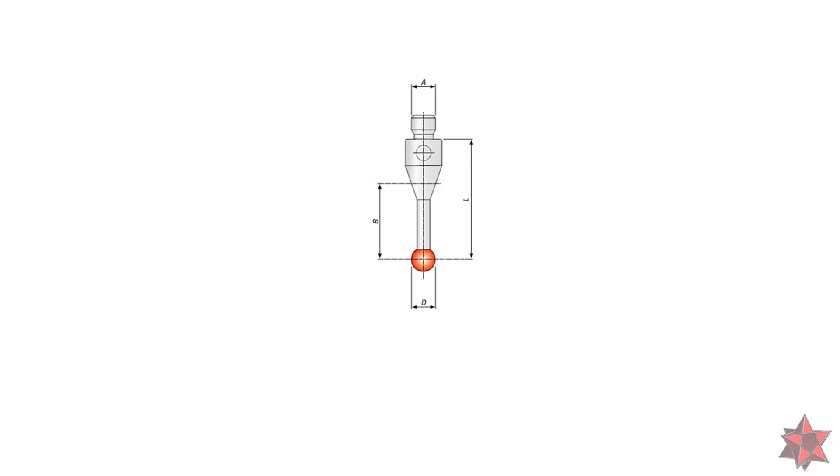A stylus is constructed from three components: the adapter, the shaft, and the stylus tip. Usually, when we look on different sites that sell stylus systems, we will see something like this. Every component from the stylus system is identified and the dimensions are marked so that you can choose the correct configuration suited for your needs.

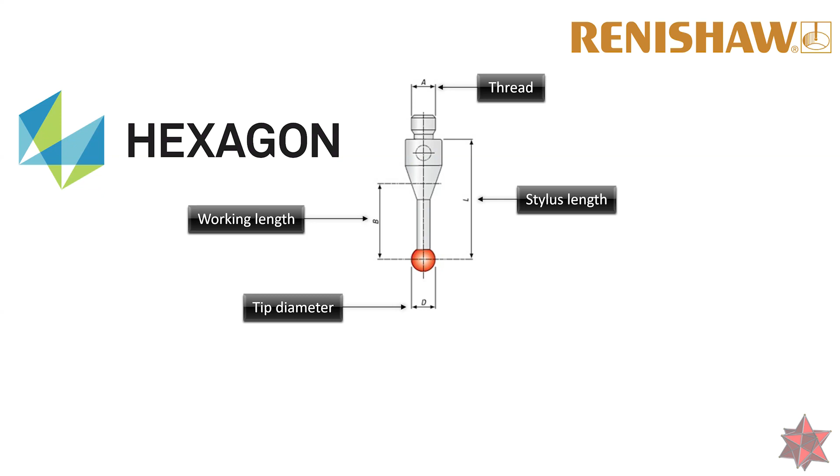Companies like Hexagon and Renishaw typically use shafts that are based on an M2 to M6 threading, and companies like Zeiss use M3 to M5 threads, depending on the type of measuring head used.

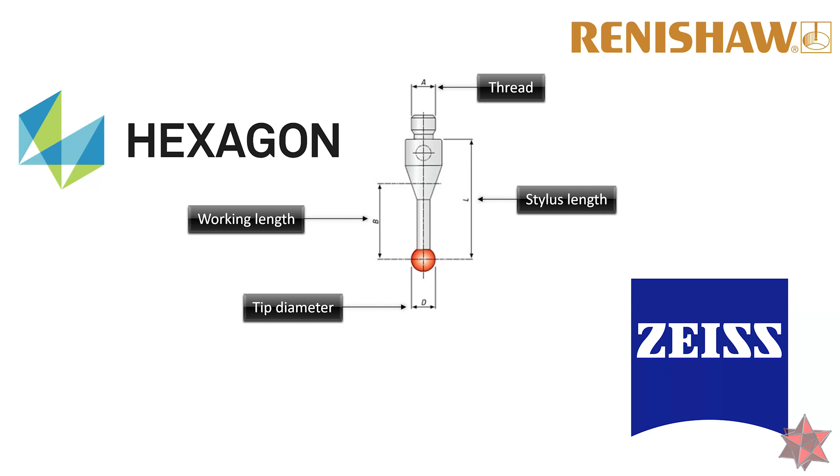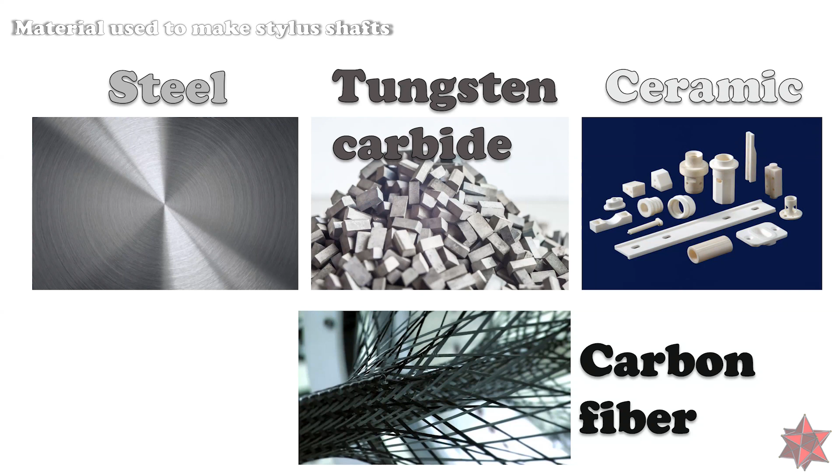Different types of materials are used to construct the shaft of the styluses, like steel, tungsten carbide, ceramic, and carbon fiber. And if we have a look at their specifications, we will find out that the differences matter. For instance, tungsten carbide shafts are heavy, do not have much deflection when touching a surface, which is good, but we have a high thermal change, meaning that when the shaft is longer, the thermal expansion suffers.

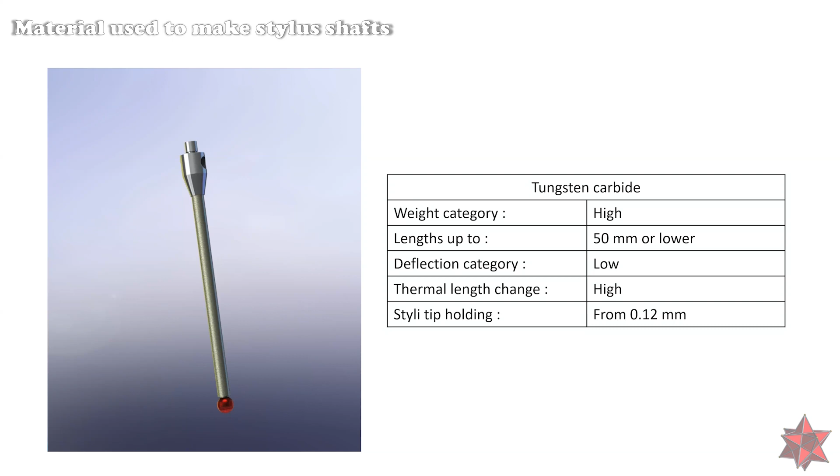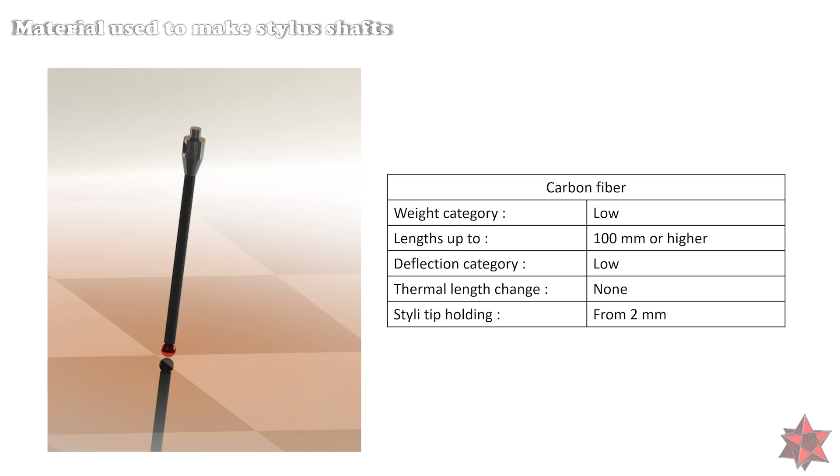But it's great for measuring short lengths or for measuring small surfaces due to its capacity to hold styli from up to 0.12 millimeters. Carbon fiber shafts have less weight, are better at deflection than tungsten carbide shafts, and have non-thermal length change. The only disadvantage for these shafts is that they can hold styli from 2 mm up and no less. Stainless steel shafts are frequently utilized for styli with ball and tip diameter of 2 mm or more and lengths up to 30 mm.

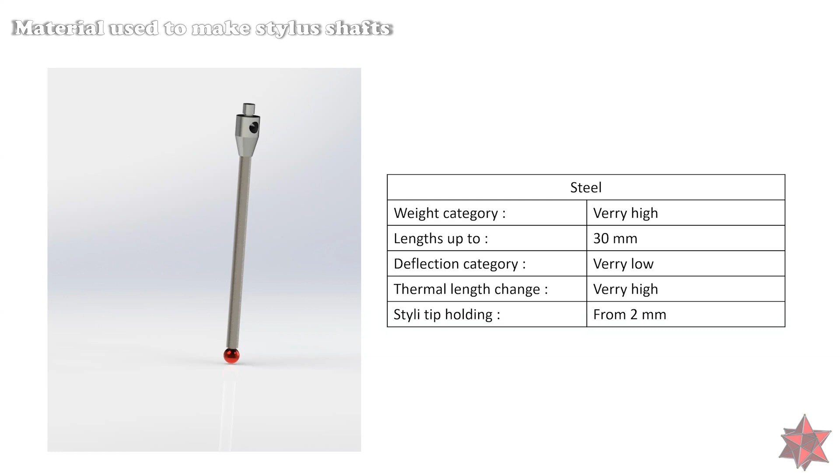With sufficient ball to shaft clearance and without sacrificing overall deflection, we can add a junction between the shaft and the thread, although one-piece shafts provide the best weight to deflection ratio within this range. Ceramic shafts are utilized with ball diameter from 3 mm. They are great with thermal expansion, like carbon fiber shafts. They have great deflection comparable to steel, but lighter in weight than tungsten carbide.

And the best part is that if a collision occurs, the shaft will be shattered, but no damage will be taken by the measuring head. It is recommended that styli longer than 50 mm be constructed with ceramic or carbon fiber shafts due to their low weight and non-thermal expansion properties.

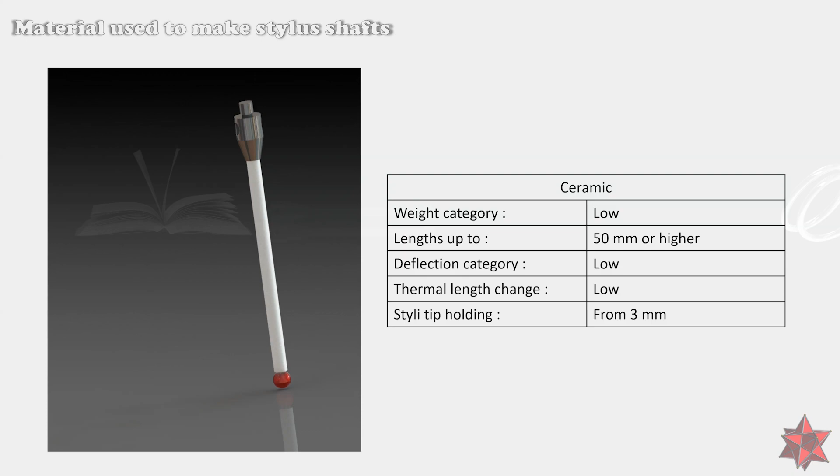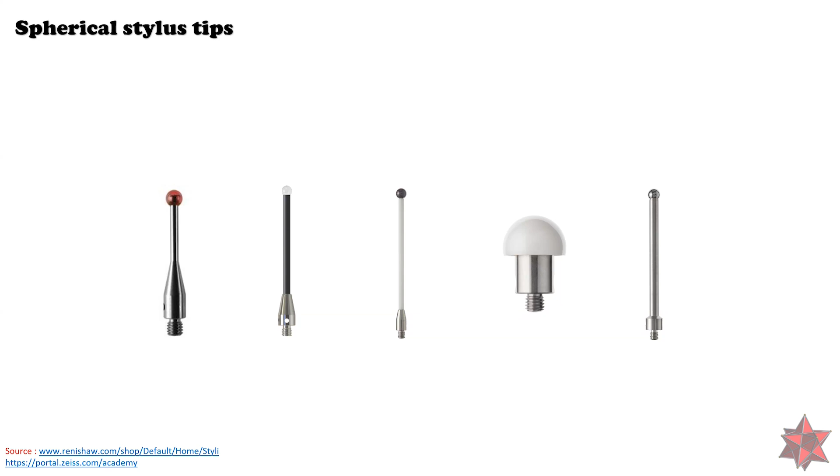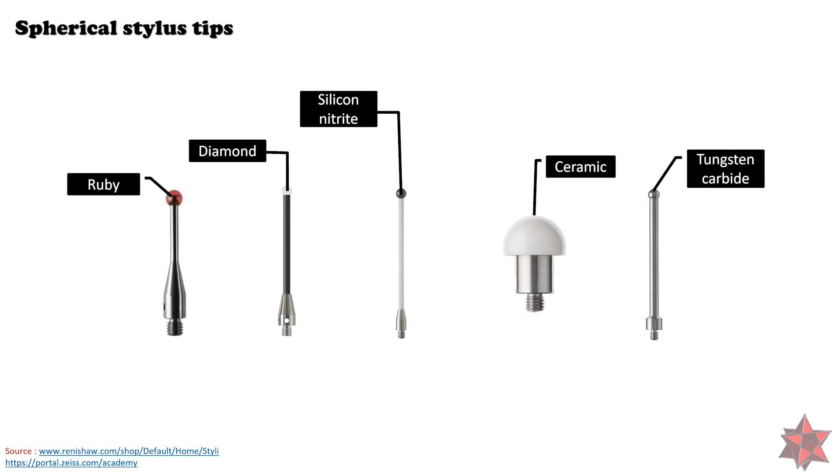Now, if we move down to the stylus tips, the most commonly used tips are the spherical ones. For precise measurements, the ball sphericity and the shaft's rigidity are essential. The tip can be made of materials like ruby, diamond, silicon nitride, ceramic, and even tungsten carbide, and can be used to measure all common tasks such as diameters of holes and shafts, depths, surfaces, and so on.

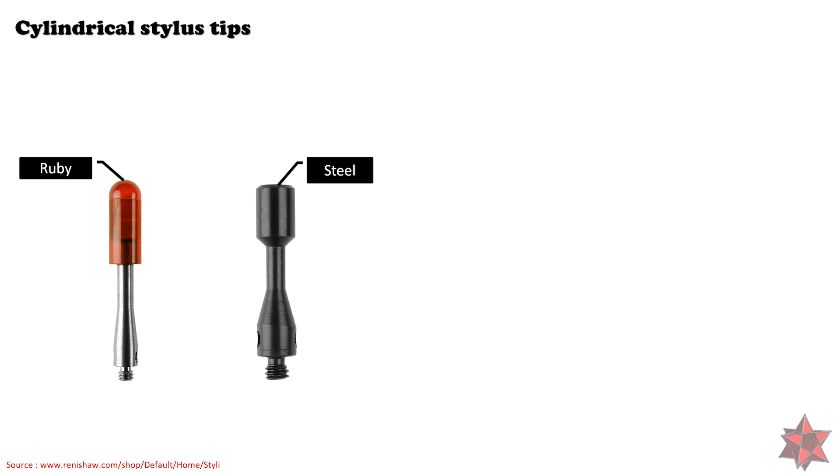Cylindrical styluses have two types of tips: the cylindrical tip with spherical head only made from ruby material, and the one with the flat surface at the end of the tip made from materials like steel, tungsten carbide, and ruby. These types of styluses are used to measure edges and are commonly used when measuring sheet metal.

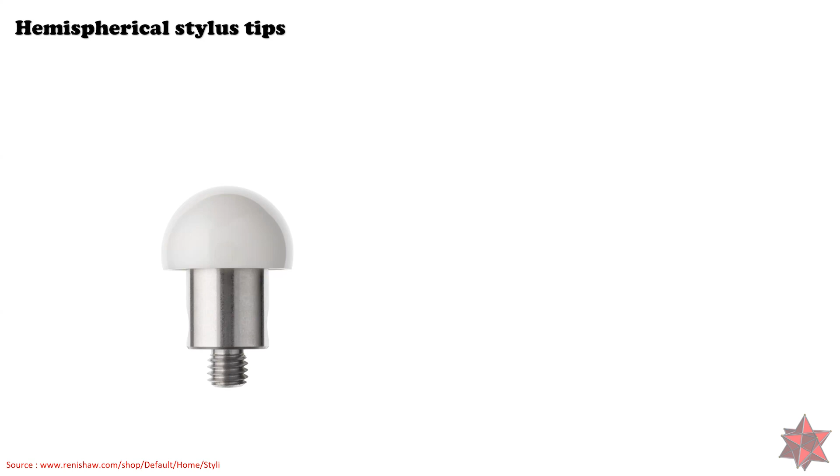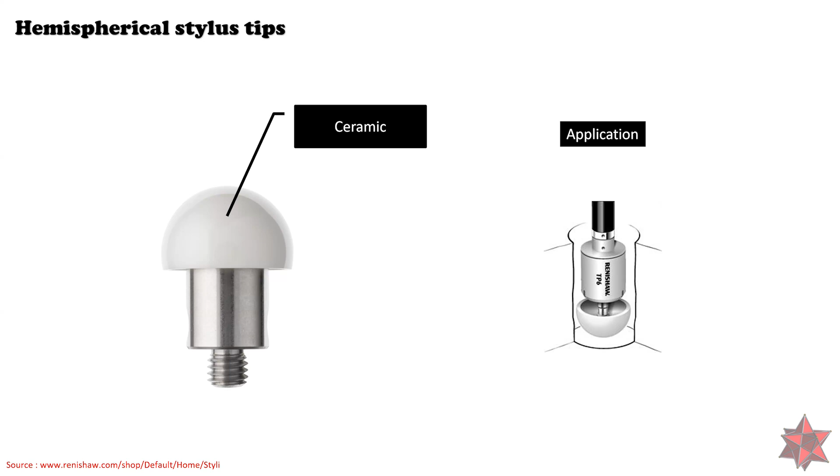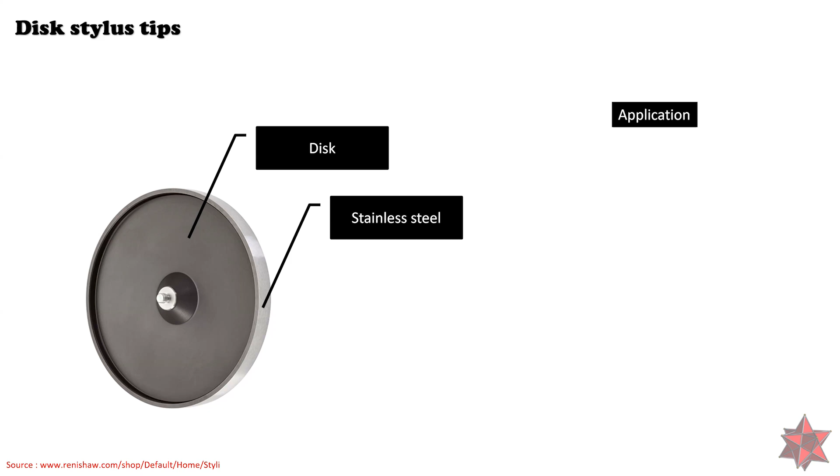Hemispherical tips are used in applications where big holes and cylinders need to be measured. The spheres are cut in half and some are even removed to respect the weight of the probe's limit values. Hemispherical tips are typically made from ceramic material. Disc stylus tips are made from materials like steel, tungsten carbide, and ruby. They are typically used to measure undercuts, locate deep grooves, and measure inside and outside of cylinders or holes.

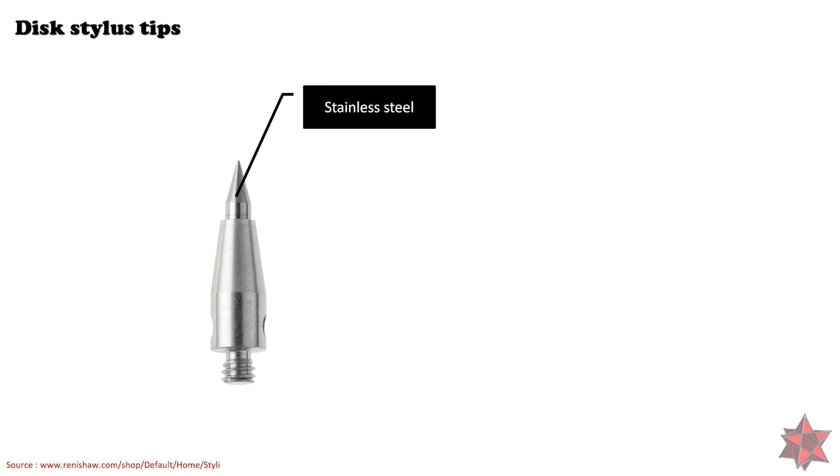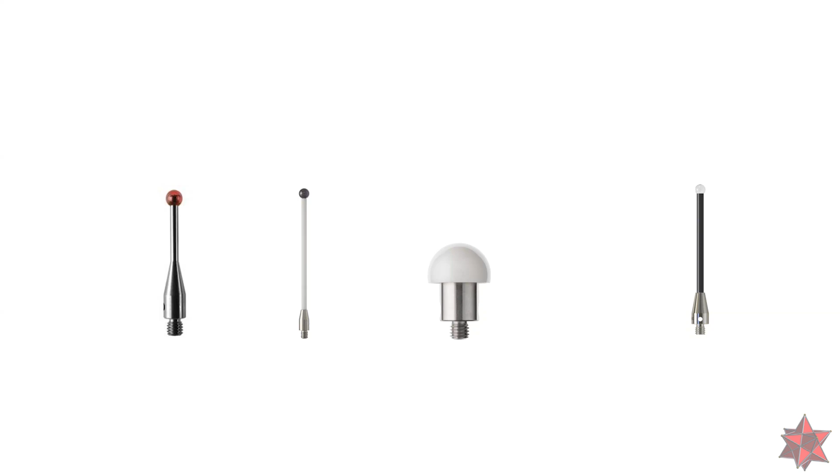When it comes to materials used to construct the styli, ruby is the most cost-effective option and has exceptional hardness and wear resistance. Silicon nitride has a very smooth surface that provides less friction when scanning and does not accumulate material as ruby does, particularly when scanning aluminium. Ceramic material used to make the stylus tips is also durable and good for measuring casts and steel parts.

And diamond is the most durable material used to make the stylus tip. But it's also very expensive, the most accessible one being the diamond coated. It's ideal to measure aluminium parts because it will not accumulate material on the surface.

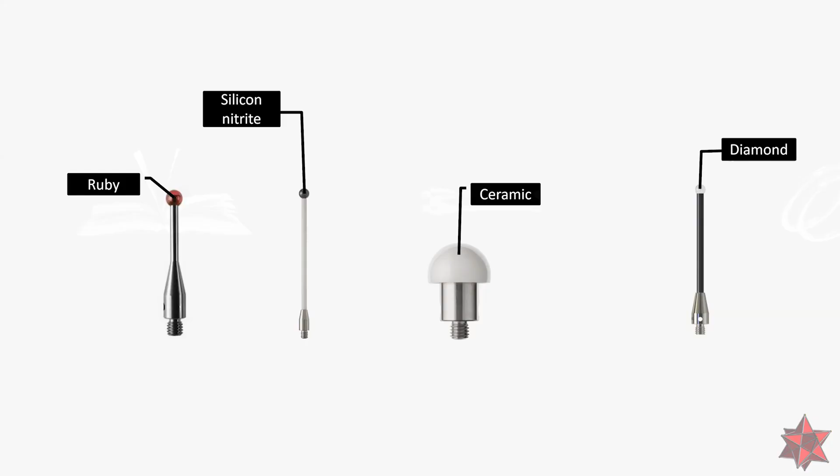But how do we know when a stylus is not working as it is supposed to? Well, the calibration will show us this. Every anomaly in the calibration above or below the standards recommended by the manufacturer can show us that something is wrong either with the measuring head or with the styli.

And the main reasons for the problems with the stylus tips are material buildups, wear of material from the surface, and cracks on the surface of the shaft and on the stylus tip. All of these defects are small and cannot be seen by the human eye. Special equipment like a microscope has to be used to determine the type of the defect. Or you simply change the stylus with a new one.

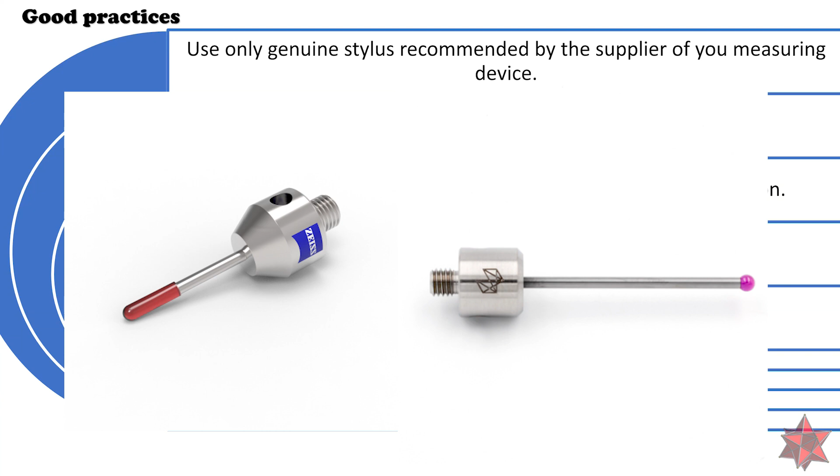There are a lot of tips all over the internet for good practices when you use styluses, but we will mention only the most important ones. So the first tip is to use only genuine styli recommended by the supplier of your measuring device. Do not try to reproduce stylus systems. They are done with precise machining and they do have quality components.

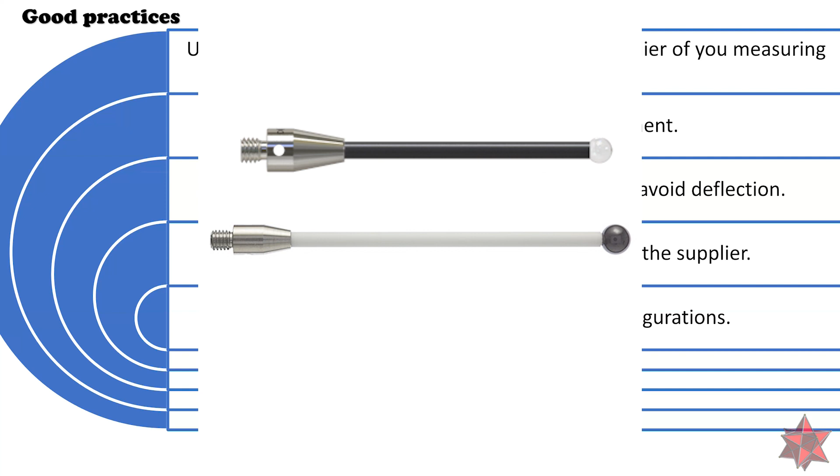Keep in mind the ambient conditions where you work. This is the second tip. If you are working in production or somewhere that you lack control of temperature and humidity, try to use carbon fiber or ceramic shafts due to their thermal properties. If possible, use the largest ball that fits your needs and the shortest shaft. It will spare you the trouble when it comes to deflection problems.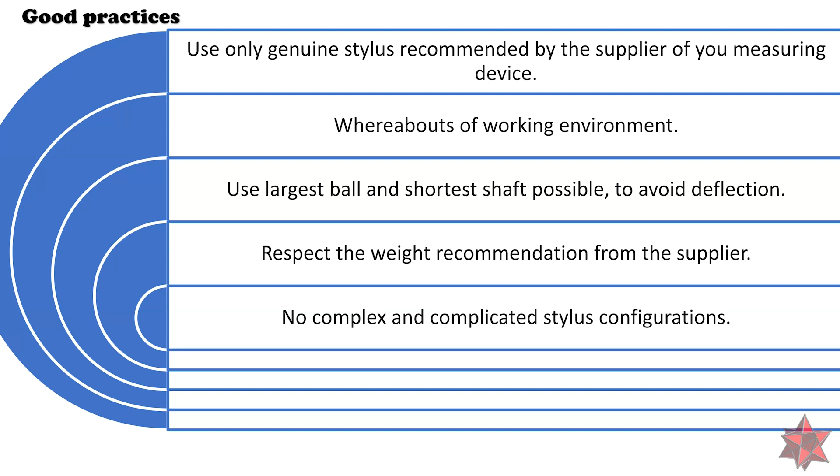Make sure you respect the recommended weight specified by the manufacturer of the measurement equipment. And last but not least, do not make very complex and complicated stylus configurations. The measurement software will have to calculate where the center of your ball is, and if you have a lot of components, this will be complicated for the software. So keep things as simple as you can.

So there you have it. Hope the information received here will help you in your work as it helped me.